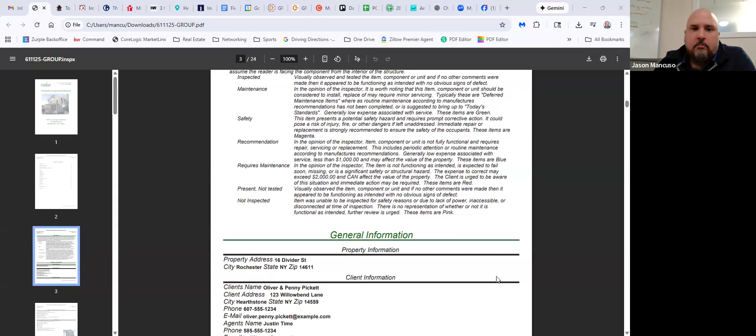And then not inspected issues, and lack of power falls into that as well. But pointing out things just for safety reasons - like exterior inspections become less thorough this time of year. Inspectors aren't going to get on top of a roof in the wintertime in improper conditions, but in spring, summer, fall, depending on the inspector and the roof itself, they may be up there making sure it's stable.

I've got general information here. It's always nice to have kind of the overall state of the union with the property, when the inspection was done.

Weather - was this done when it's pouring rain? And then you can reference back with a buyer, like hey, this basement was bone dry, and the inspector notated it, and I remember it pouring rain then. That's helpful information to have. Also just general specs of the house.

Then you get into the report itself again - I'll fly through this just to touch on really the table of contents. Getting into the lots and grounds, just the walkways outside, the steps, the porch, and how's the grading.

Grading becomes an overlooked item of a property. If the grading of the land is pitched towards a house, that's a big concern for water issues in the house and the foundation, versus if the house is sitting up and the grading is pitched down for water to flow away. Around the foundation specifically, notice any areas where there may be a slope of soil or grading that pitches towards the house while the rest is flat and graded properly. That should trigger you to check what that side of the basement looks like.

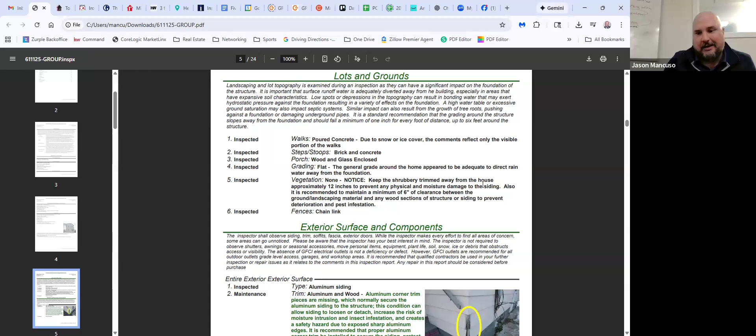You become the protection, because guess what? Every time that happens, like when the insurance company tells someone they're going to cancel the policy if they don't fix something, that comes back to you, unfortunately.

This is why it's important, not just protecting your time and making sure the transaction goes through, but to make sure they know the decision they're making based on the condition of the home, and how it could affect them after closing from a budgeting and comfort standpoint. Also, the insurance company may take the option off the table and say, no, you need to do this now, we're not insuring you anymore if you don't.

Went on that rant just off of a vegetation aspect, but specifically trees hanging over houses. Questions on that? That was kind of a topic I just threw out there. It should be scary, I guess.

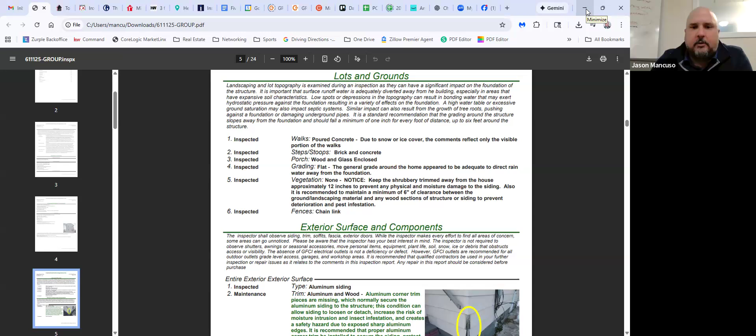All right, moving on. We got fences, exterior surface and components. Here's where you get a maintenance flag for the aluminum siding, or trim in this case, where corner trim pieces are missing that normally secure the aluminum siding to the structure. This condition can allow siding to loosen or detach, increase the risk of moisture intrusion and insect infestation, and creates a safety hazard due to exposed sharp aluminum. Recommended to repair. What they're saying is the house isn't going to fall down as a result of this, but you're going to want to maintain your home and take care of it.

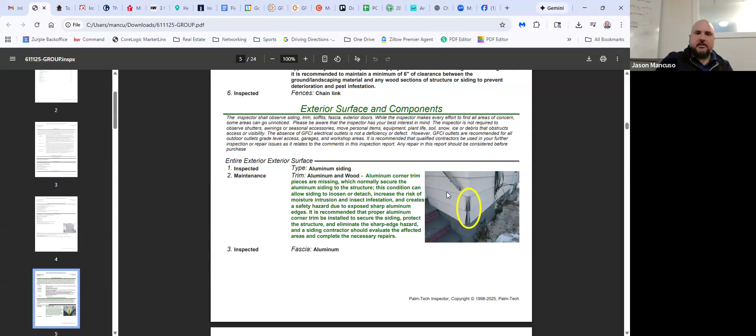So fascia and soffits, just to explain the items - fascia would be this piece here, kind of like a trim piece in between the roof and where the siding starts, if that makes sense. It was kind of tough to see. And then soffits, they should be, for the most part, just a component like siding to the house, but oftentimes they provide ventilation to the attic.

Here you've got a loose piece that you're gonna want to fix, because water can get in there and freeze in the wintertime, then expand and cause further damage. Or you could have a squirrel jump on the tree and believe it or not, fit through that hole - I got squirrels in your attic.

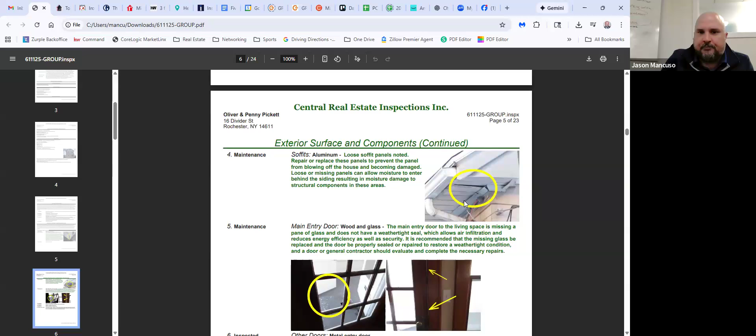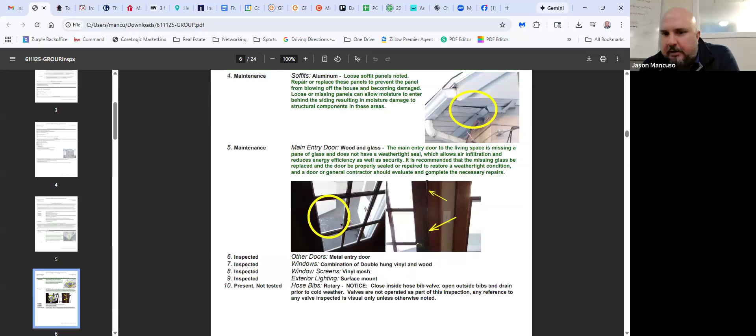So exterior, now analyzing the doors. There was a missing pane of glass here, he mentioned not a weather tight seal, stuff like this. There hasn't been anything here that you can't see yourself as a buyer's agent, or be surprised if there is anything in this report.

But again, doors, window screens, exterior lighting, hose bibs - a little note about shutting off the hose bib in the wintertime so it doesn't freeze.

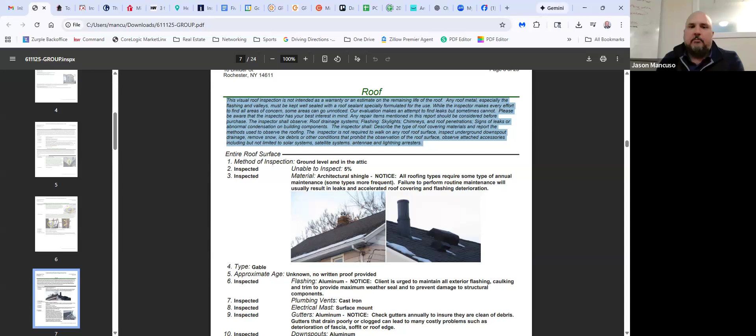Roof. Again, here's kind of some language that really establishes the whole visual inspection - we're not responsible for anything after the fact, it's just our opinion, not a warranty guaranteeing this much life left on it or this or that. So he inspected it at ground level and in the attic. There was some snow cover, so he was able to inspect 95% of it.

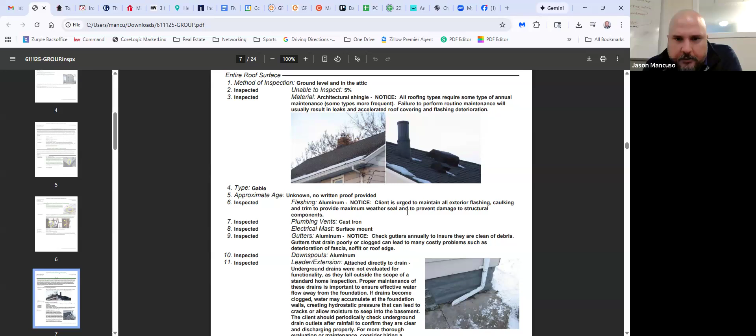There's nothing here that determines the roof is in poor condition, so that's good. I would still, with something like this - we didn't get into a ton of detail - in terms of the major components that are going to cost a buyer the most money, you're looking at roof, siding, windows, probably in that order of expense.

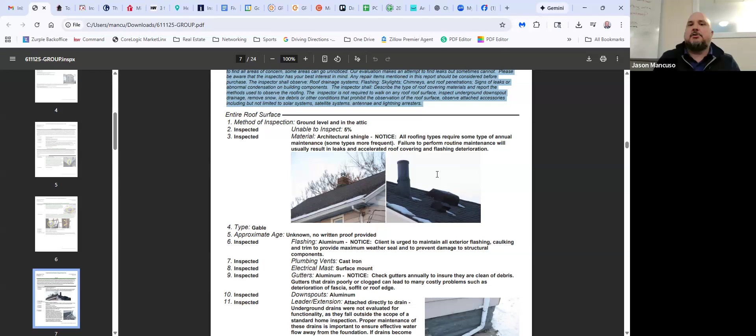Windows, depending on how many there are and how unique and big they are, can be a pretty costly expense as well. So even if an inspection report like this comes out where the roof doesn't have any negativity associated with it, I'd be taking a close look with the buyer to make sure they know what they're getting into - even to the point where it's like, we're predicting 10 years left of life on this roof. Do they understand that, and the costs associated with it 10 years from now? You'd be surprised - you'll find a lot of potential homeowners decide they're not potential homeowners once you go over this stuff with them.

As a side topic, I mean, it's okay - not everybody is designed to own a home. Some people prefer the quote unquote luxury of, okay, if there's an issue that's going to cost me 20 grand to reinvest into my home, that's not how I like to do things, and I'd rather just have that be the landlord's problem. Not necessarily encouraging that, but that's - you got to dive into this stuff with people.

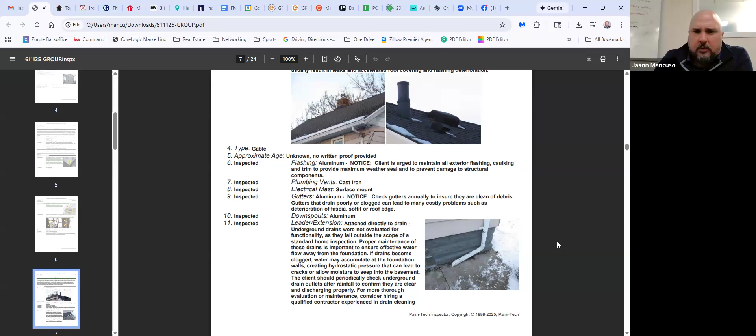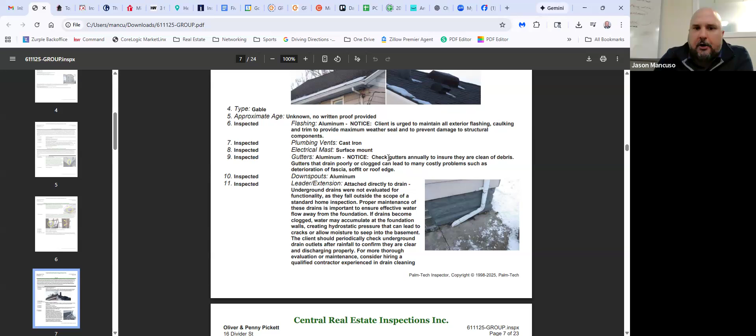We get into flashing, plumbing vents, the electrical mast which is the riser cable where the electric meter is, and the cable that goes from the meter to the top of the house connecting to the wiring at the poles in the street to power it. Also gutters, downspouts, extensions, etc.

Here's more inspector CYA stuff. We've got a downspout extension attached directly to a drain. There's nothing bubbling over in terms of overfill from past rain that points to a current issue. It's snow on the ground now, so I wouldn't expect there to be. So they'll note, hey, we don't know how these drains are functioning without analyzing further.

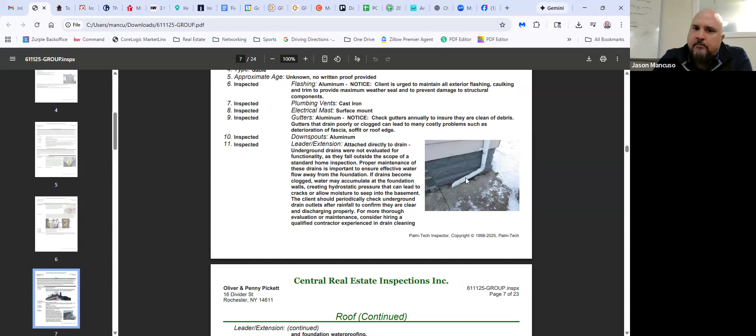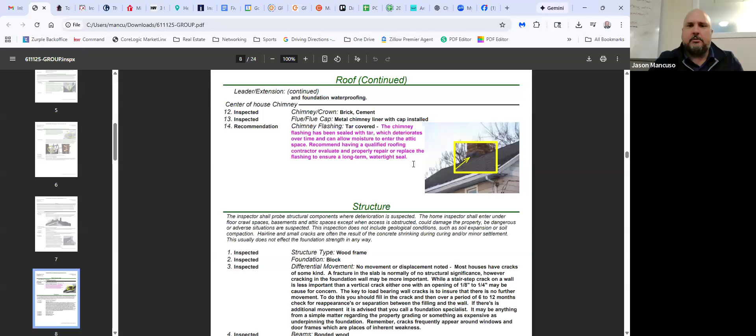Still on the roof, you've got the chimney, the chimney cap, and the flue. Here's a recommendation notice: the chimney flashing has been sealed with tar, which deteriorates over time and can allow moisture to enter the attic space. Recommended to have a qualified roofing contractor evaluate, properly repair, or replace the flashing to ensure a long-term watertight seal.

Let's zoom in on what he was looking at. You can tell it's kind of an old tar job that has deteriorated - you can see it doesn't even go around the other side of the chimney. Definitely going to want to take care of that to prevent any moisture from getting into the house.

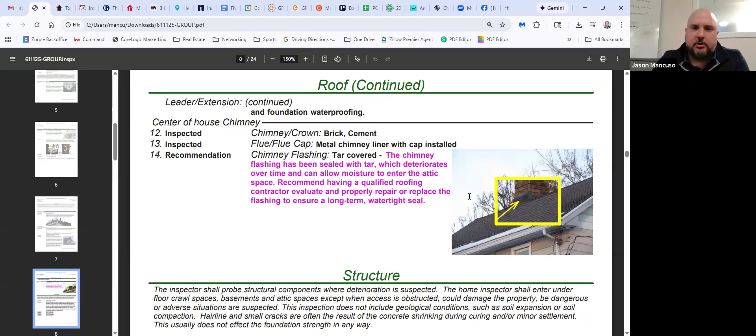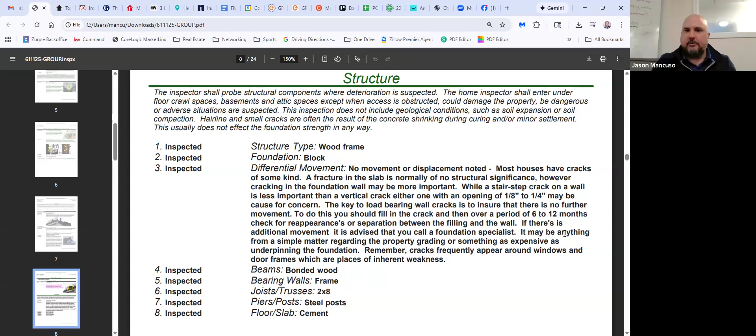Structure - noting it's wood frame, block foundation, not seeing any differential movement in the foundation, but also the CYA statement that this is an old house and most houses have cracks. Here's how to think of these cracks. I'm flying through this because you'll all have this to review in depth, and can certainly follow up with me directly with any questions.

Additional structural issues involving the beams in the basement, the joists and trusses - when the basement ceiling is exposed you see the structure of the first floor. That's a benefit you have with an unfinished basement versus a finished basement. Keep that in mind - buying a house with a finished basement, you really have no idea what's going on with that crucial part of the overall integrity of the house. So it's a risk you're taking no matter what, inspection or not.

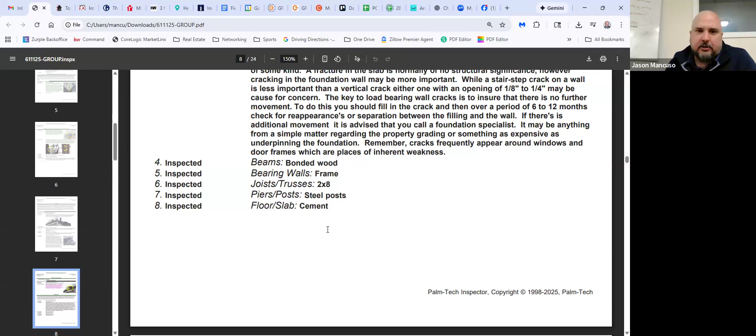Points out the type of each material in the structure. We've got a safety issue with a hand railing that's not secured properly - something minor, but an issue nonetheless.

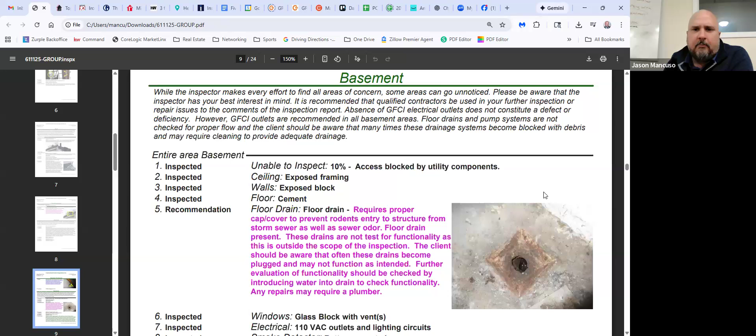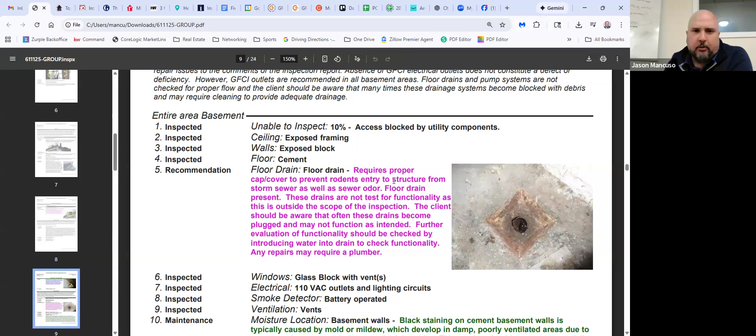Getting into the basement - noting the ceiling and floor drain. Here it was noted there wasn't a proper floor drain cover or cap in this floor drain in the basement, and you're going to want to get that because you could have sewer odor, you could have rodents getting in. Just definitely something to fix.

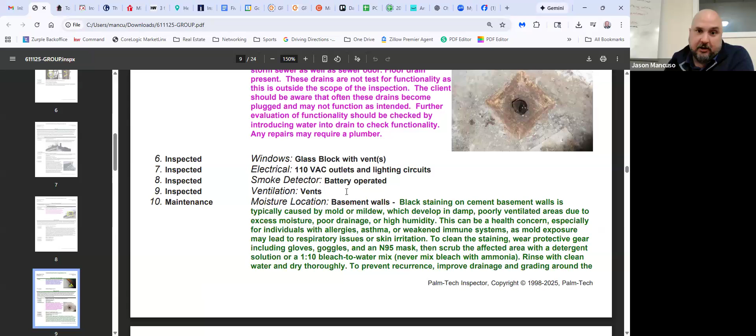It's an easy fix. Glass block windows in the basement, notes on the electrical service. Is there a smoke detector? Is there ventilation? And moisture.

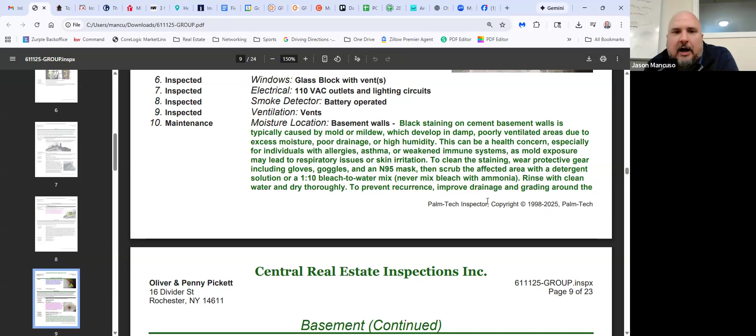You've got some moisture that was evident here visually - black staining on the cement basement walls, typically caused by mold or mildew, which can develop in damp, poorly vented areas due to excess moisture. So just pointing this out, but not pointing out why or how yet.

Another safety issue with no handrail going down to the basement. All right, getting into more exciting stuff with the heating system.

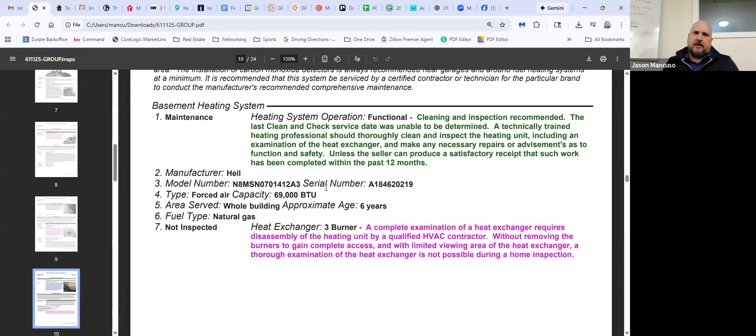They noted that it's functional, it's working, but recommending a cleaning and inspection because the last clean and check service was unable to be determined. He's recommending getting that done unless the seller can produce a satisfactory receipt that such work has been completed within the past 12 months. If the inspector saw a record of a service being done every year, they probably wouldn't have noted that.

But you get into the manufacturer, the model number, and all that, so you have it. He mentioned this live when we were there, but at this point with AI, you could just take a picture of a furnace and it'll probably tell you enough about it that you need to know.

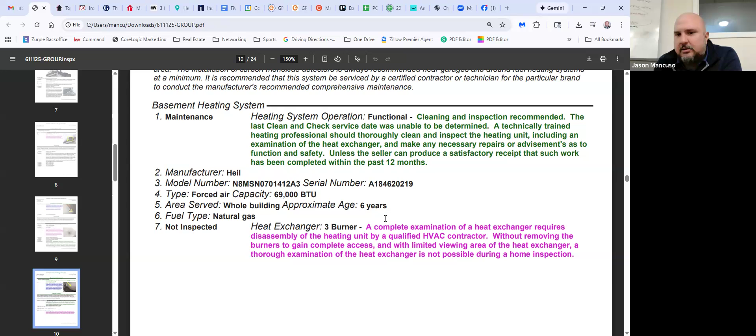If you get the serial tag on the furnace, you can plug that into AI and find out the exact age or other aspects to it. A heat exchanger, if it's broken in a furnace, you need to get it replaced, period. Because now you have potential carbon monoxide issues, so anytime there's a cracked heat exchanger, it's going to need to be replaced.

This wasn't inspected, it wasn't visible to the inspector, so they're always going to cover their butts and say you should really get your furnace checked out if it's of concern to you, because I couldn't, and I'm not an HVAC tech anyway. So you get that kind of CYA aspect with inspectors, like they're not here to be experts or the contractor for any one specific trade when it comes to a house, most of them anyway.

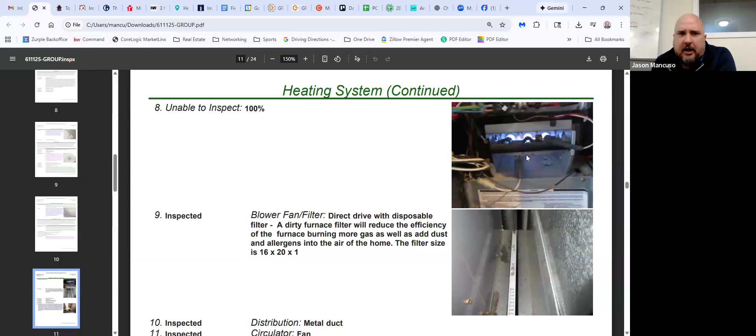So they take this approach where it's like, hey, here's what I think, and if you really want the foolproof answer, you want to get a professional that specializes in this aspect to check it out. Here's a picture of where the inspector would be able to take a look at the heat exchanger, and he's unable to inspect 100% of it.

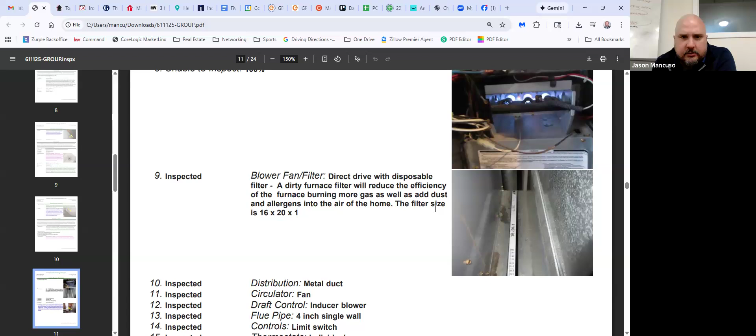What do we got? Dirty furnace filter, reduces the efficiency of the furnace. Doesn't say that it was dirty, so more information about the furnace.

Now, I'm not an expert, but here's my crash course on asbestos. Back in the day, 100 years ago, and I think up till maybe the 50s, asbestos was just a building material. It wasn't until then that it was determined to have significant health risks when there's a high level of exposure to it.

So with these 100-year-old homes, let's just walk through the scenario here. You got a buyer with a budget, or just a necessity to live in the city of Rochester, where most of the homes are going to be 100 years old. Somewhere in your consultation, and I'm not saying this is something you bring up on day one and scare them off, but somewhere along the lines it should be discussed that a lot of these homes have asbestos because it was just a building material back in the day.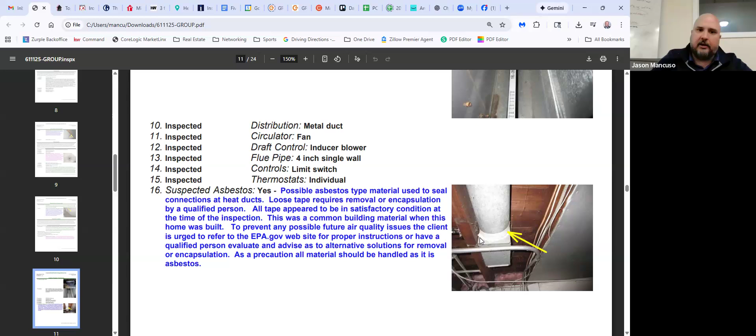That's an aspect too to understand. I'll cover my butt to say, from my understanding, as a homeowner, you can dispose of asbestos in your own home that you're living in without professional remediation. Anytime it's a house you're not owning and living in, and you're dealing with asbestos, now you got to bring in the guys with the spacesuits to remediate.

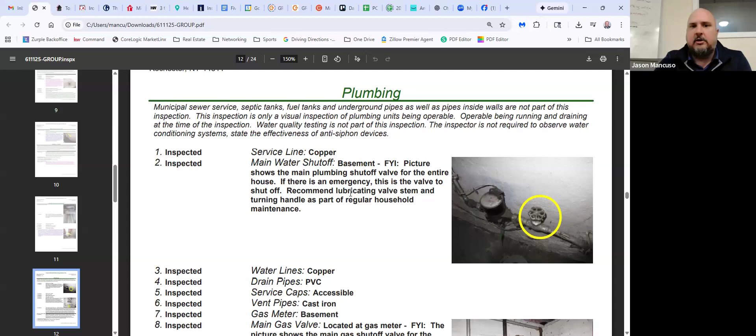Plumbing, checking out the water main shut off, the service line. Is it copper? Is it PEX? This is for really education and notation purposes. So far everything here in the plumbing side of it is just being noted by the inspector.

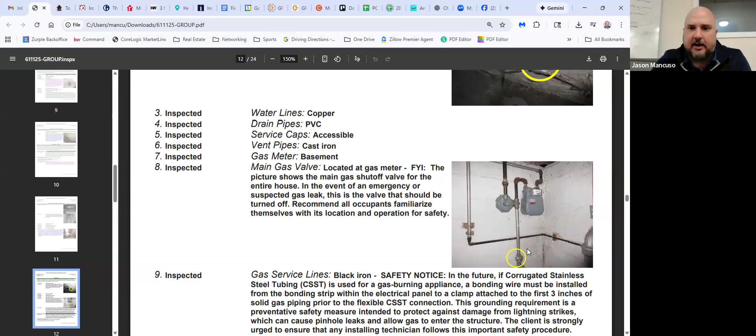What do we got? In the event of an emergency, suspected gas leak, this is a good education piece where, hey, if you need to shut off your gas, this is where you do it. If you need to shut off your water, this is where you do it. Gas service line.

Basement water heater, at time of inspection it's all operational. Also noting that you may have to replace pieces in the water heater every 5 to 7 years to improve the quality of the hot water. What do we got? This one is 6 years old.

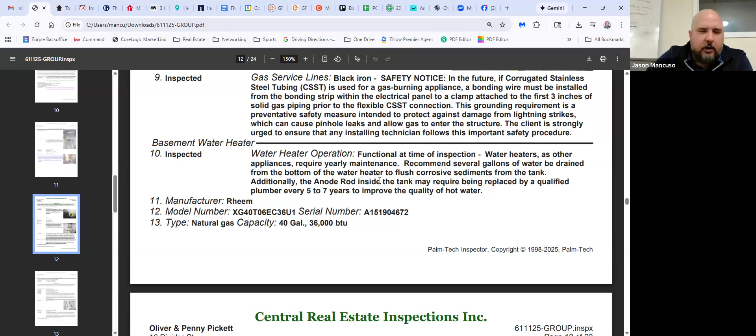It's not noted here, but I would tell a client to expect to replace a water heater every 10 years. So this conversation is, hey, it's 6 years, water heaters are finicky. It may blow tomorrow. If it's brand new within the last couple of years, it should be fine. But when you get to this age of 6 to 10 years, I'd take a 'could be any day' approach to be conservative.

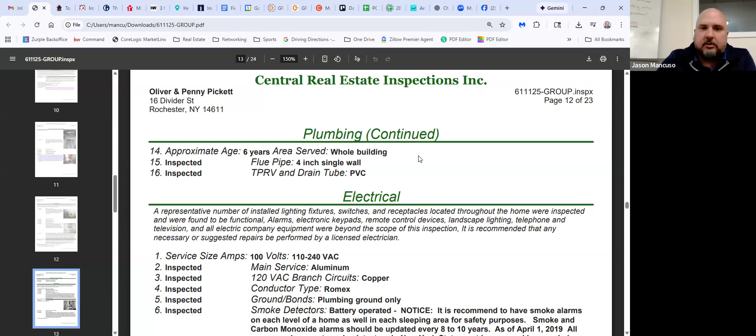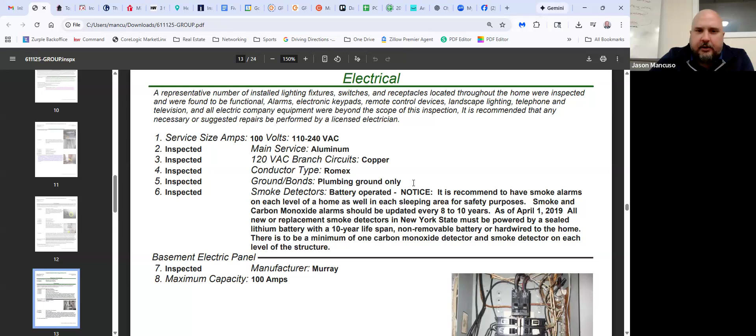Electrical panel or electric, noting the amps and volts into the house, the main service, and type of wiring. Are things grounded? Do you have smoke detectors? This is where an inspector does provide more than we can by removing an electric panel and checking the wiring.

Unless you have specific permission from the seller and the seller's agent to take off the panel of a furnace or an electric panel, I would strongly encourage or require that you do not do that without permission. God forbid you start messing around with something and sparks start flying, and you're liable or potentially liable.

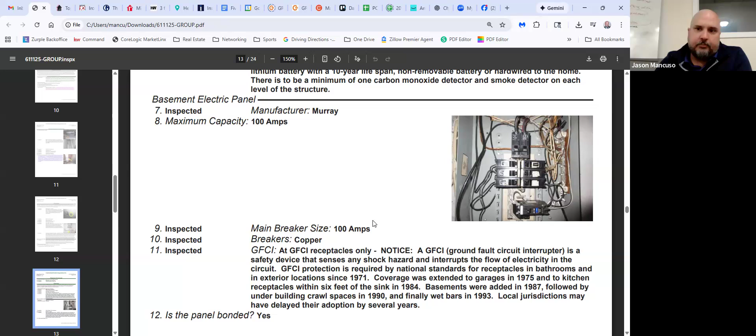Notes about GFCI outlets. This has got it at the receptacles only, meaning the outlet itself. More modern homes have them both in the breakers. GFCI is anytime a breaker trips - there's too much power going into it, or there's detection of water or a safety issue, a breaker will trip and shut off power to that device or outlet, so it doesn't continue to overheat or overload. Electric and water aren't a good mixture - that's the protection GFCIs provide.

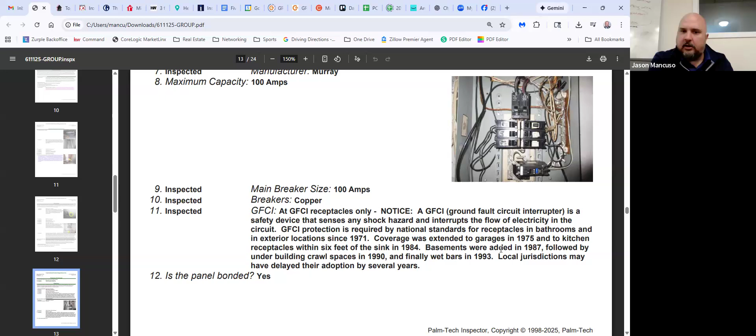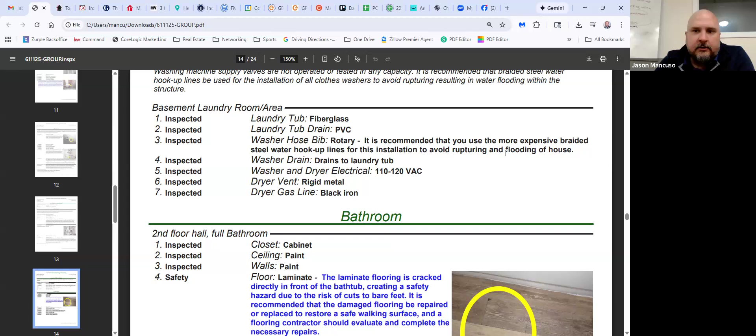Basement laundry area. Here we got a recommendation, but nothing notated, but it's recommended they use more expensive braided steel water hookup lines to avoid any cheap hose bibs that bust and drain water all over your basement floor.

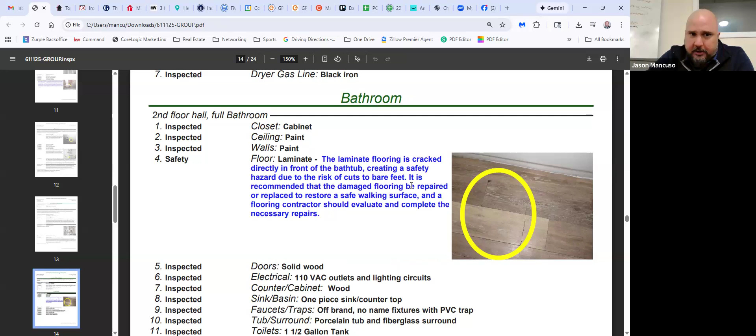Getting into the bathrooms now. Notated some cracked flooring on a laminate floor - a safety risk due to potential cuts on the feet. But everything else looks good here. Ventilation in a bathroom is important - this one had a fan. If it didn't, it'd be notated.

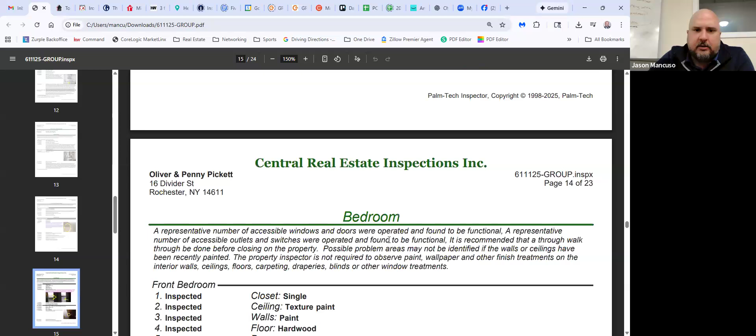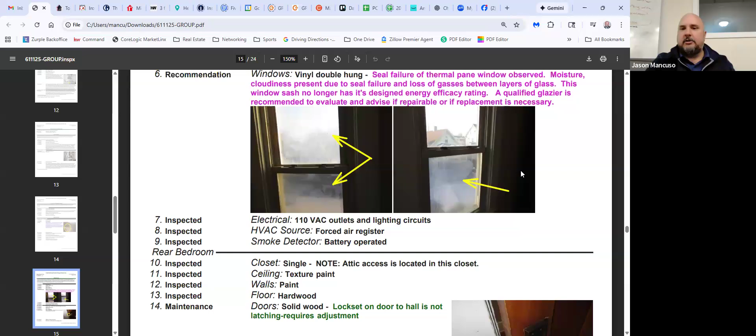Getting into windows. What's notated here is anytime you see this fogged up element in a window, that means likely it's a double pane window, meaning two panes of glass, and the seal with that glass - I guess the way to describe it is the glass being sealed keeps the efficiency that a double pane window provides. When you see this fogging up of the windows, that means the seal is broken, and therefore the energy efficiency that's supposed to be there is likely lost as well. It's still a window, still there - you can't really look out of it in this case, but you don't have air blowing in directly, you're just less energy efficient when you see this.

There's one guy in town, his name's Lou Waters, and he can take this window frame and re-energize, I guess, the seal to these windows without having to replace the entire window. So keep that in mind as an option when you're seeing old windows with this fogged up look - you may be able to get away with just fixing that one window, for less than what it would cost to replace the entire window.

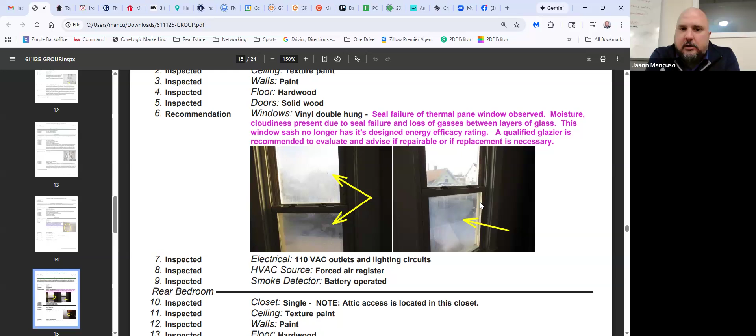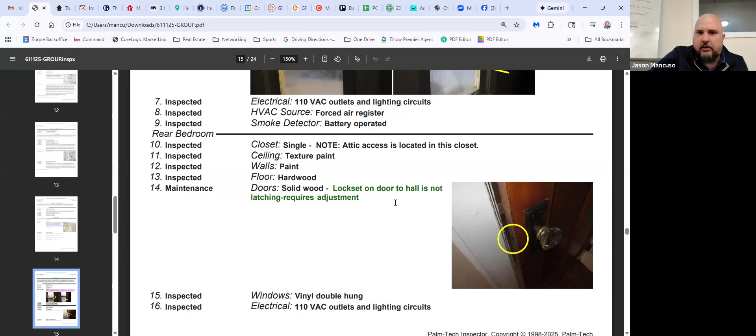Bedrooms - again, he's looking at closets, ceiling, walls, floors, right? Where are the defects? If I only run into, like, here's a door that's not latching - thorough inspection, right? Bedroom continuing, same type of stuff, smoke detectors, etc.

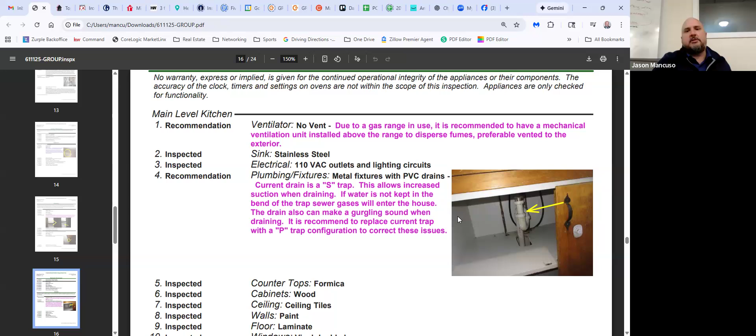Plumbing fixture: the current drain is an S trap, which allows increased suction when draining. If water is not kept in the bend of the trap, sewer gas will enter the house. The drain can also make a gurgling sound when draining. It's recommended to replace the current trap with a P trap configuration to correct these issues.

So it's kind of modernized plumbing, I guess, right? The S trap compared to the P trap. Things evolve over time. S traps were common at one point, then the notion of potential sewer gases coming into the house caused a change to it.

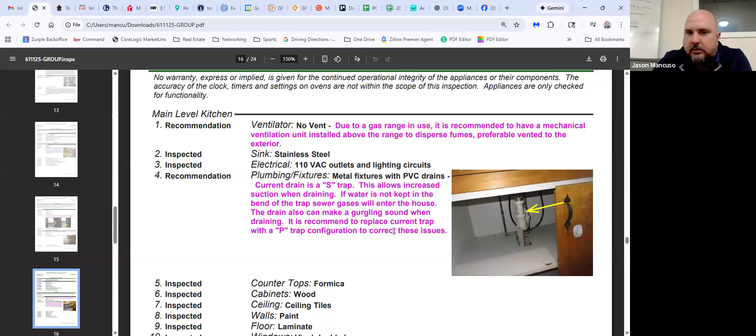Notating countertop standards, etc., in the living space. Flying through it just because we're cut on time here. More windows, and these windows couldn't stay open, so that's an issue, right?

Attic - here's what I want to get to. Well, first of all, looking at attics is key because you can tell a lot by the roof. Anytime you can see a roof like this where there's plywood underneath it, that's a good sign, because that means at some point the roof was torn off and put on new.

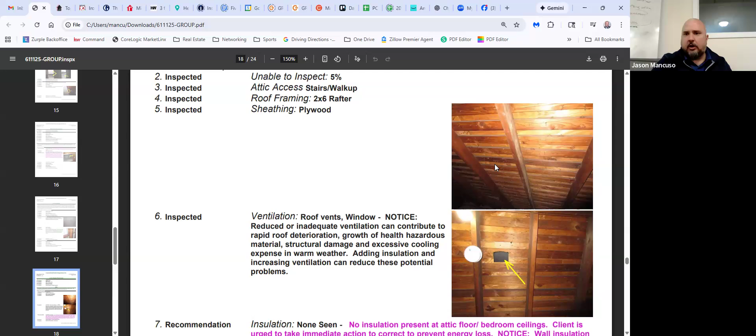If you were looking at this and seeing what look like layered shingles above the framing here, that would tell you this has many layers on it, or at least a couple. It's old. When the roof does need to be done, we're going to need to do a complete tear off based on that method of construction for the time.

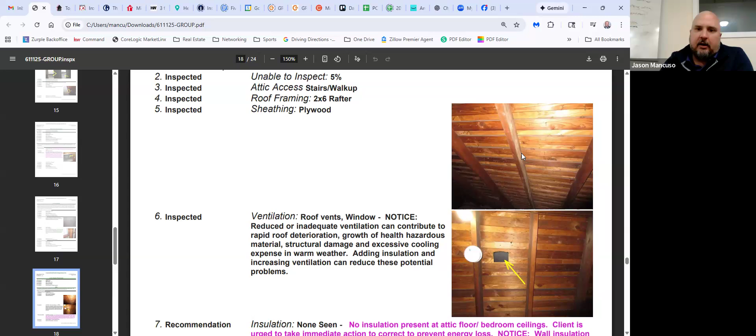Another big thing is ventilation. Here they've got roof vents, a window - it's just noting reduced or inadequate ventilation here. It looks like there was a vent that was sealed off that they're pointing out, but also noting that between the soffits and the window and the roof, there's still enough ventilation.

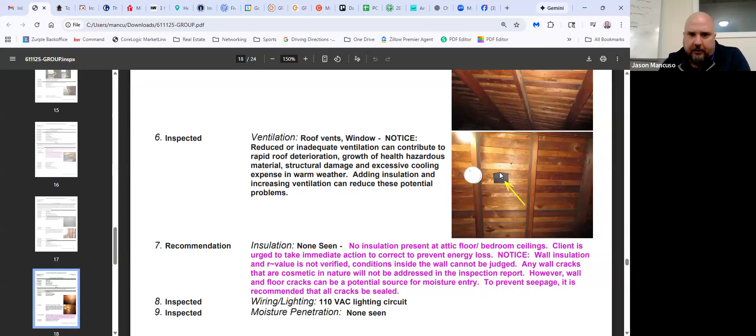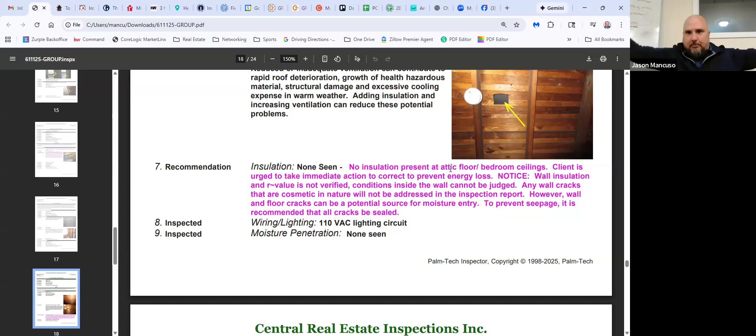Insulation - there is none, it's saying. So what that's going to be is an energy efficiency concept: you don't have any insulation protecting the conditioned, livable areas of the home from a non-conditioned area like this attic, where it's not finished and there's no heat going into it. All the hot air rises, and without this insulation it's just escaping, causing less energy efficiency throughout the house.

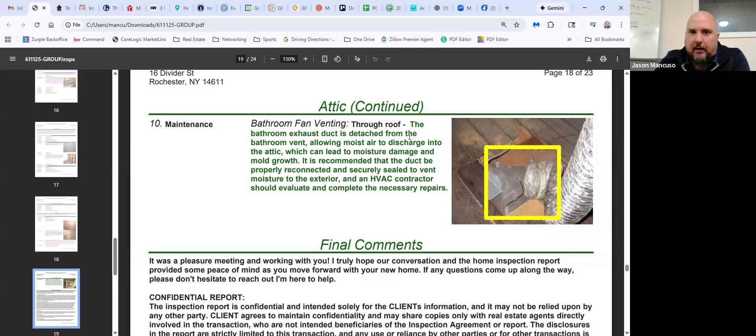And the bathroom fan is vented through the roof, which is good. However, it's currently detached, so obviously a defect there.

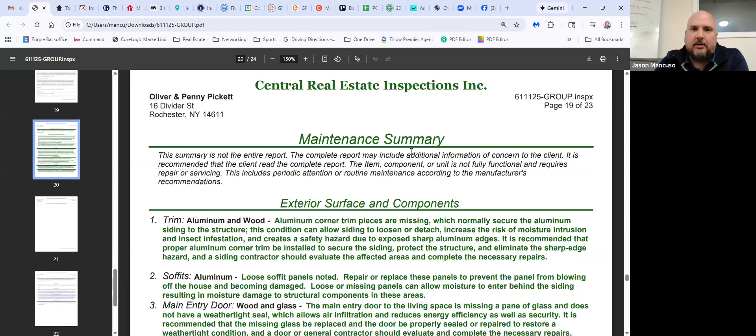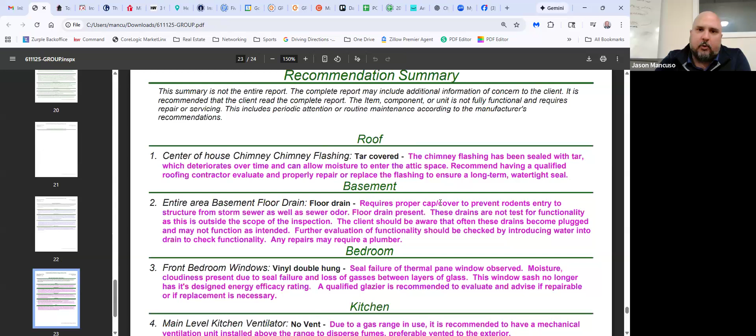It begins with final general comments, but then it reviews all the recommended areas. What I like about Jim's report is he breaks it down in multiple ways. You've got the recommended things to think about in this maintenance summary, then you've got your safety items and what to take care of there, and then you've got a recommendation of bigger ticket items that fall on the safety and overall maintenance of the home category. And then also pointing out that, hey, we weren't able to see what this furnace is really doing.

That's the crash course. Sorry to go over time here, but you'll get this sent out this week with the report, along with the videos from the inspection itself to review.

Again, the messaging here is to really focus on how you're advising your clients on the condition of the home, and not leaving it up to a home inspector or just to their own devices. You need to be a partner to your clients to make sure they're making a decision that makes sense for them, based on as much as you know about the home from your research and what you can see in person - a similar dynamic to what a home inspector has, in the sense they're just seeing it in person too. They just have a license and a lot more experience with these aspects to professionally comment on.

Again, I am not saying go out and tell your clients you're the equivalent of a home inspector and therefore they should waive it, but you can be in a position to educate, inform, and set expectations on the condition of the house you're inspecting, if you're able to have an offer accepted with a contingency - to make sure you're not wasting their money just to find out the inspector told them something you could have told them, that influences their decision not to buy the house.